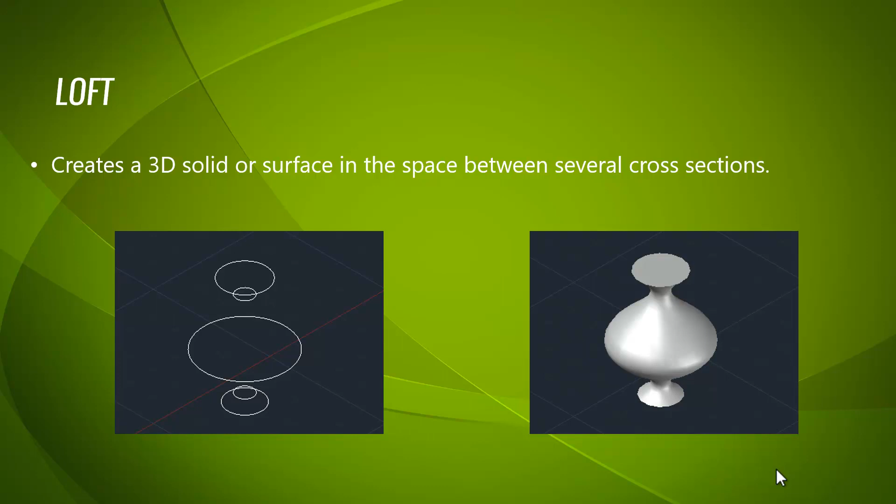Now let's see these options in the software. Consider I have a circle like this, another circle like this, another circle like this, another circle like this, and a circle like this.

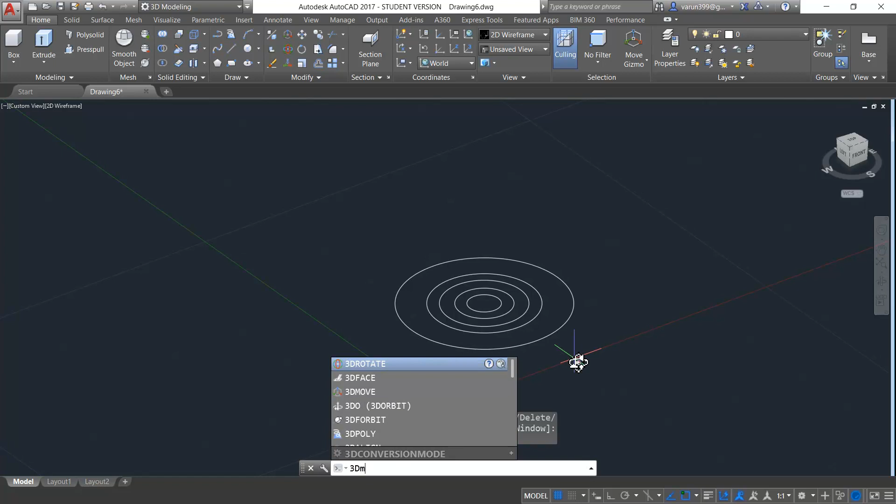Now let me arrange these circles in the Z-axis. For that I will type 3D Move and press enter. I will select the circles which I want to move towards the Z-axis - that is this one, this one, this one, and this one. Press enter, and I will show my axis like this and move it slightly upwards like this.

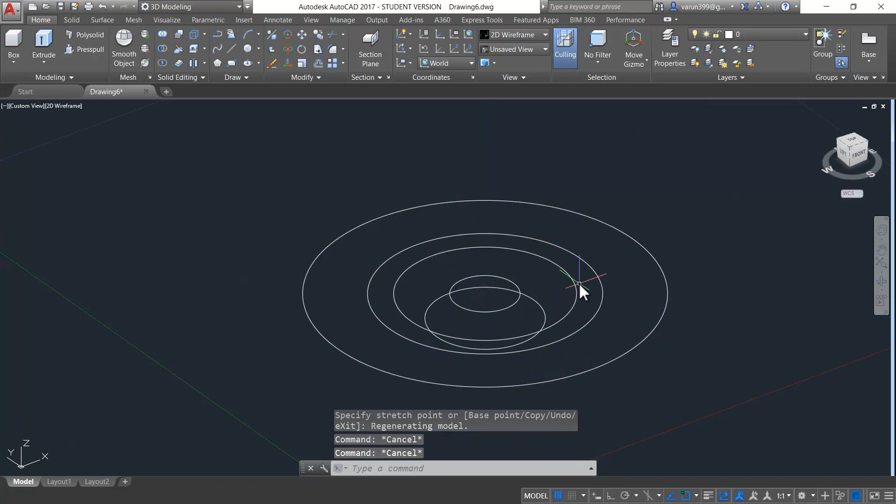Similarly, I will do all the other circles to get a shape like this. As you can see, all the circles are now arranged toward the Z-axis at different heights.

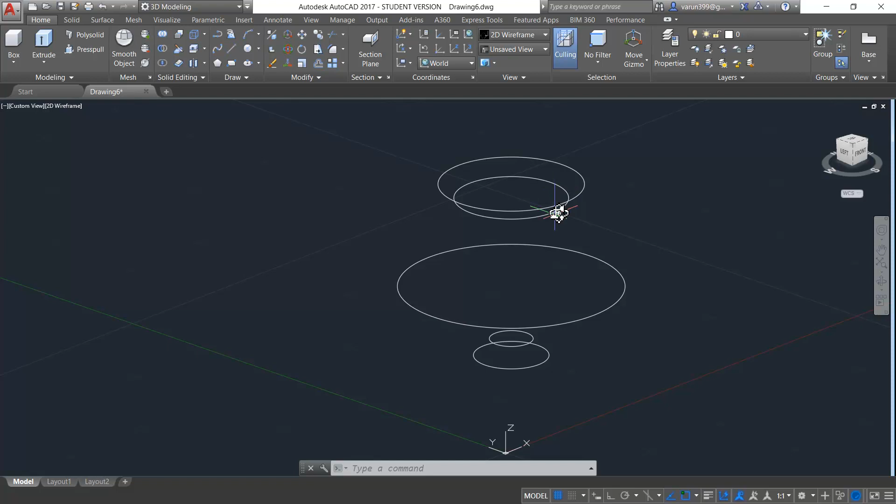Now, the Loft command is very useful while combining different cross sections in a direction. So here we will use the Loft command to combine these different cross sections to get a specific structure. I will type Loft, that is L-O-F-T, and press enter.

It is asking you to select the cross sections. So I will select the cross sections which I want to make into a loft, like this, going on, like this, and perfect. After selecting the cross sections, you can press enter to continue.

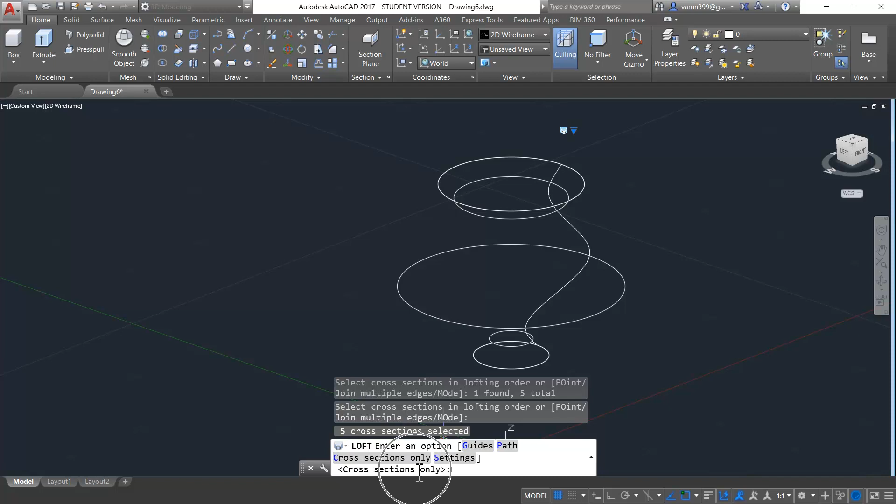Now it is asking certain settings. With the default setting, that is cross sections, we can complete the loft to get a shape like this. I can change my 2D wireframe to shaded to see that the object becomes like this. Pretty nice, right? So like that, you can use Loft in various methods.

Now let's see certain inner commands in Loft. Consider I have a circle like this. Now let me draw a polygon inside the circle, that is POL, and press enter. I will go with the 5-sided polygon, that is 5, and press enter.

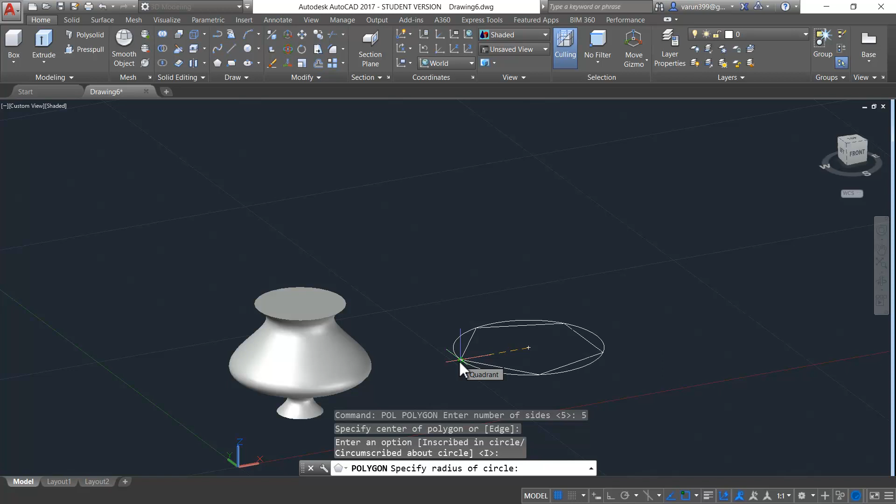I will specify the center of the polygon exactly at the center of the circle like this. Going with the inscribed in circle option, I will show my radius exactly towards the quadrant of the circle like this. Now it's perfect.

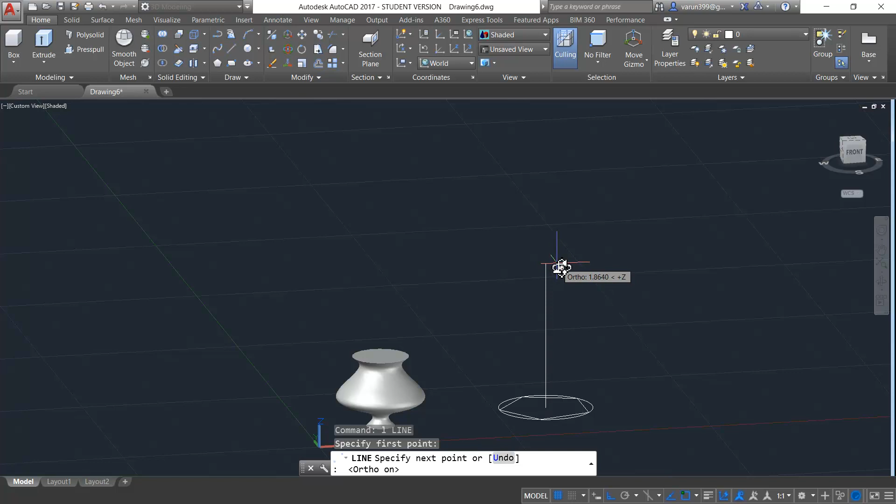Now let me draw a line exactly from the center like this. Remember, in order to draw the line towards the Z-axis, we must make our ortho mode on, that is F8 must be on to get the plus Z symbol. When you have the plus Z icon with your cursor, that means your line is now drawn toward the Z-axis. So let me draw the line at a certain height like this and draw it towards this side.

After completing, let me copy this polygon from this base point like this and place it exactly at this endpoint. Now what I will do is rotate this polygon to become perpendicular to this line.

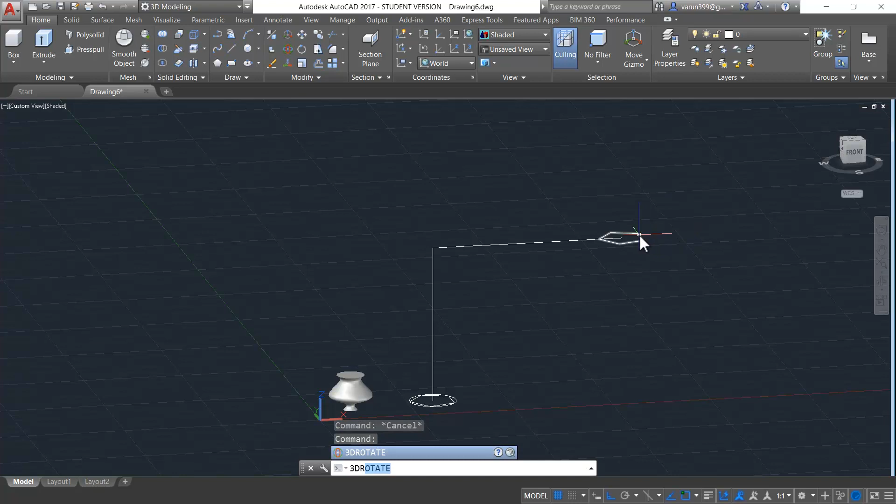So I will use the command 3D Rotate and press enter. I will select this polygon like this and press enter. You can manually change the base point to say the endpoint like this, and show the rotation of the axis from here, and give the value -90 to make it correctly like this.

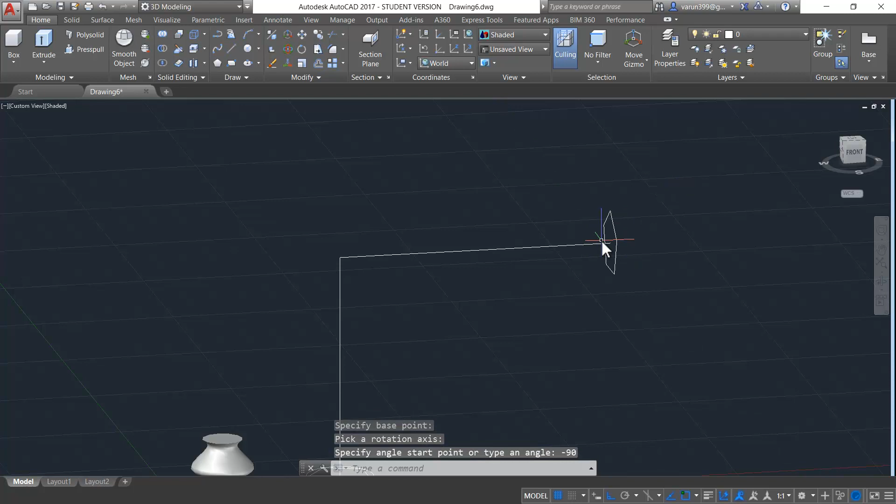You can give 90, then the polygon will come upside down. After completing this, let me delete this circle which I had drawn for reference. Now let me change my UCS from the default value to a specified UCS like this and this.

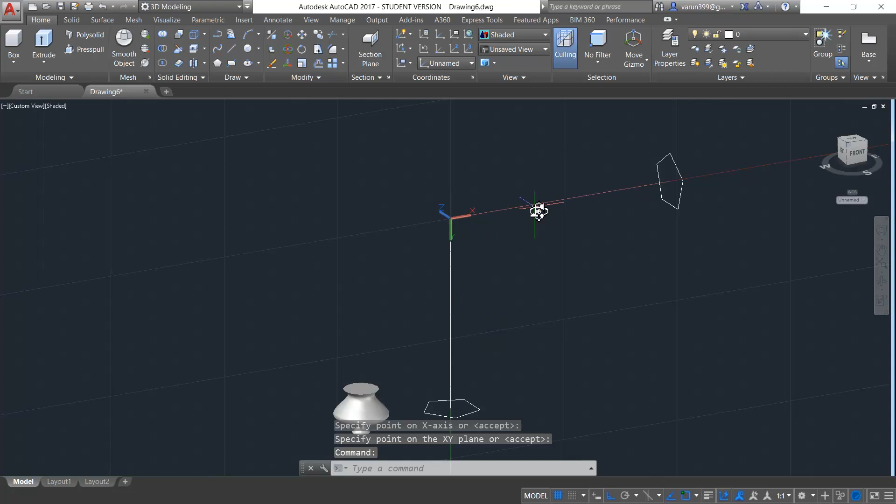Now the requirement is that I want to make a fillet between these two lines. I will type F and press enter. For the radius, I will give the value 3 and press enter. I will select this line and this line, so this becomes a curved shape like this.

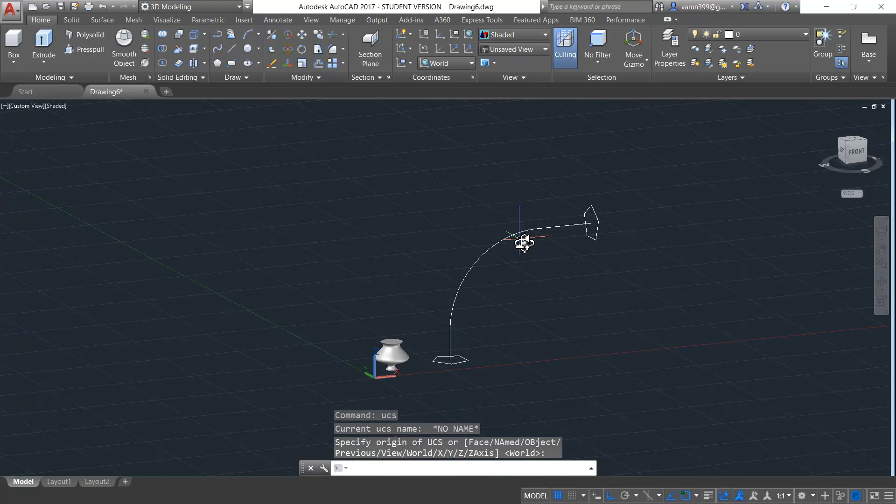Let me bring back my UCS to its default value: type UCS, press enter, press enter again. Now as you can see, a path has been defined, but it is separate lines and arc. So we can use the command join to make this path a single path. Correct, now you can see it becomes a single path.

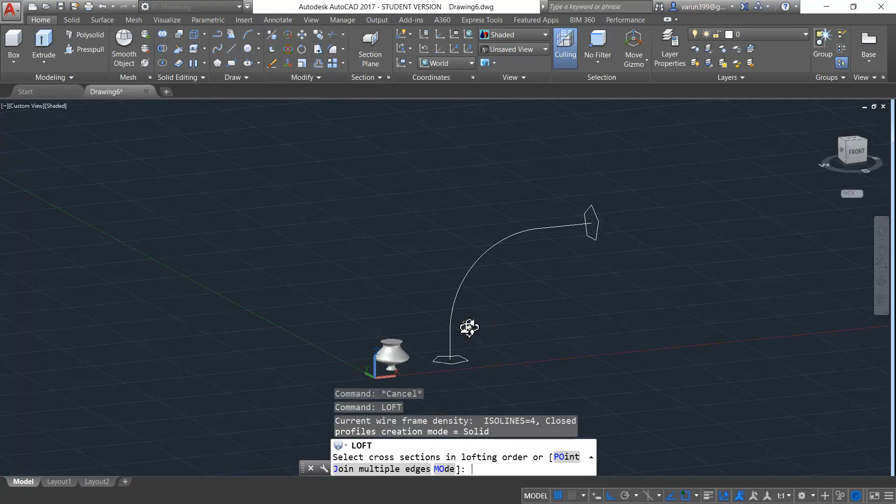Now let us see the loft command, that is L-O-F-T, and press enter. Let me select the cross sections which I want to loft, that is this one and this one. After selecting the cross sections, I can press enter.

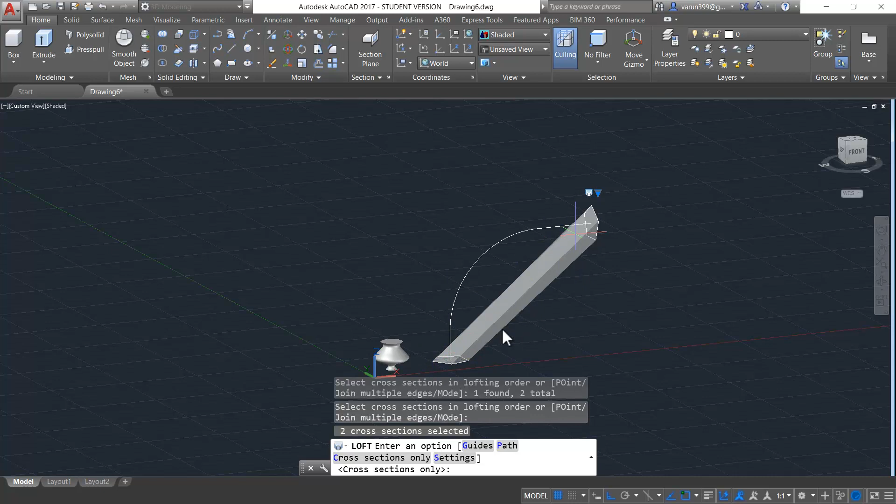The first thing we have to learn is path. This path will help you show a path of the lofting object. Now as you can see, when you do the loft, it is directly connecting between the two shapes, it is not showing in a path. So when you go with the option path and select the path like this, you can see the loft is now continuing with the path.

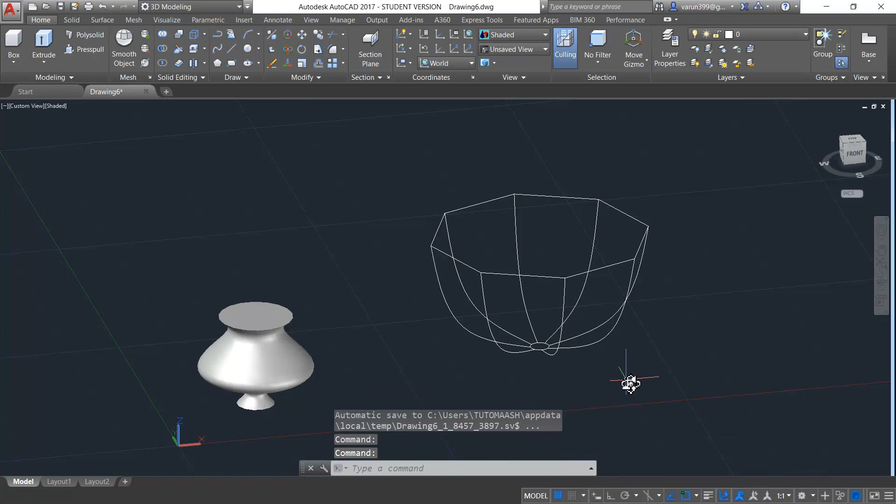Pretty interesting, right? Now the next inner command in loft is guides. Let me get you an example. Now let us do the loft: L-O-F-T, press enter, showing the cross sections, that is this one and this one, you will get the loft like this, which is not the required loft we needed.

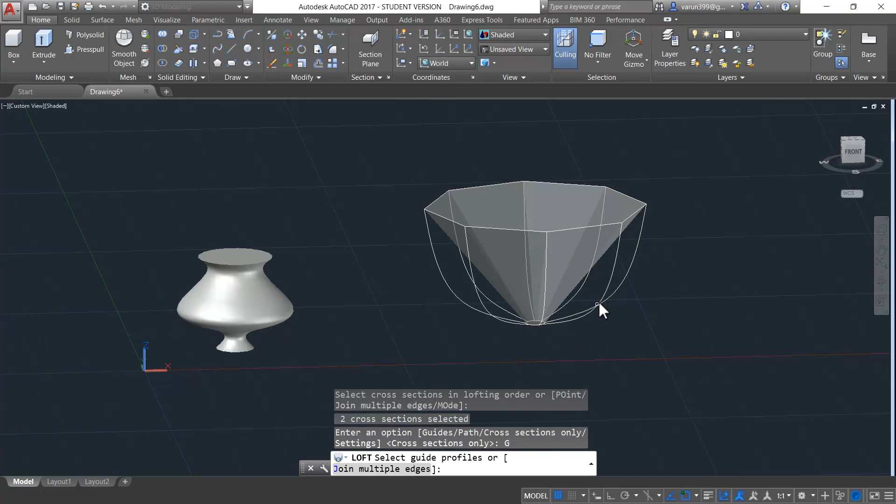So I will press enter and go for the option guides. This guides will help you guide the loft path. So I'll select guide and show each path like this, starting from this one, and you can see that lofting gets through that path. I will select this one like this and go on selecting the other guides to get our required object. Now you can see the loft is completely following the guide paths to get the required shape.

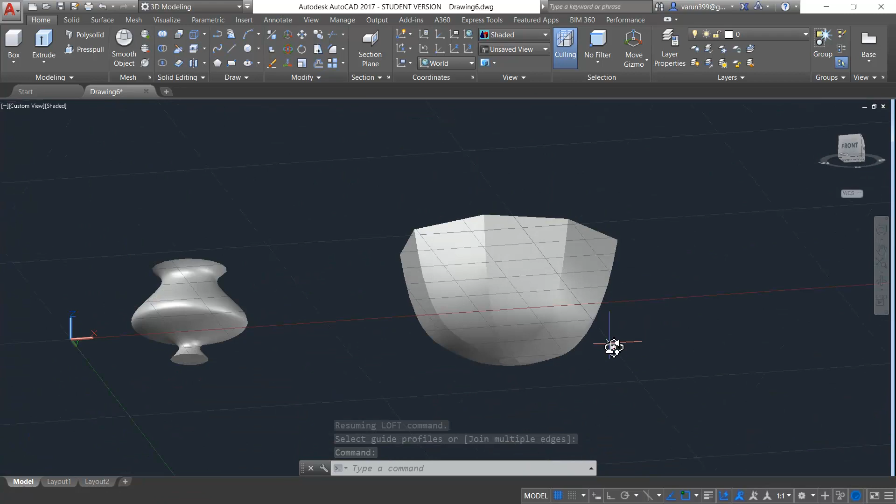I can press enter to get the object like this. So like this, you can use loft in various methods.

Now consider I have another circle here, and another small circle here like this. I will use 3D move to move the small circle towards the top, somewhere like this. Now let me do the loft, L-O-F-T, press enter, selecting the cross sections like this and this, you will get a shape like this.

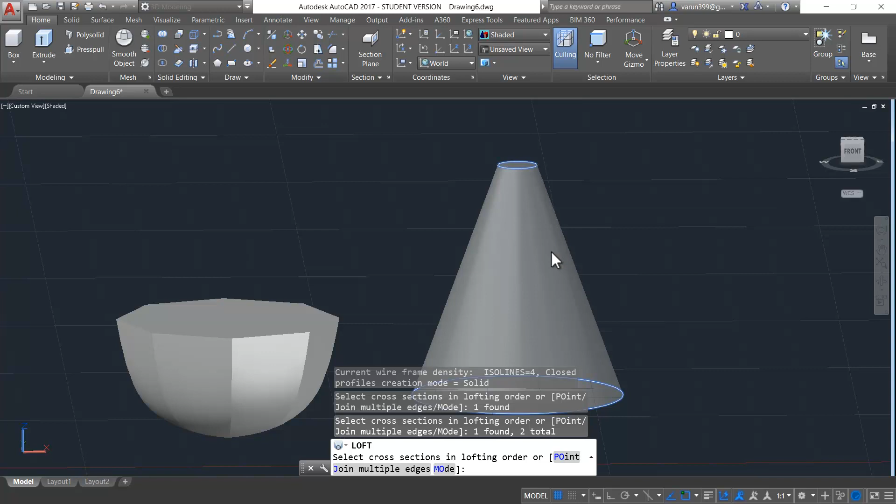When you press enter, you can see a small icon like this. This will also help you adjust the shape of the loft. When you click over it, you can see the default value is smooth fit, which gives that shape. I'll go for ruled to change it slightly.

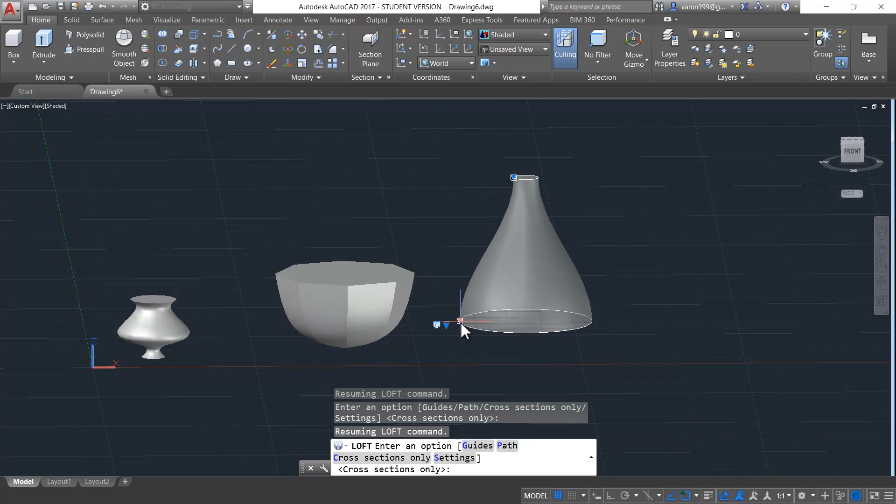You can go for other options or you can go for draft angle setting. When you select this one, you can actually set the drafting angle. So selecting this one, you can give the angle like this or like this. You can select here to change the angle here also.

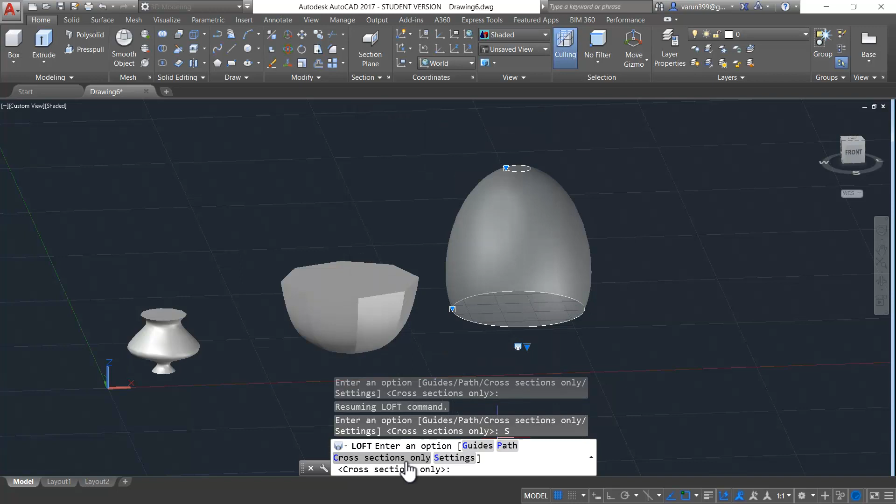Now you have the last option available here, that is settings, which will lead you to the settings dialog box where you can give the drafting angle values to make it accurate. You can go with the default value, that is cross section only, to get your object like this.

So like this, loft has a tremendous application in the software and you can design many complex objects with the help of loft. So that's the end of this session, and we hope you understood well.